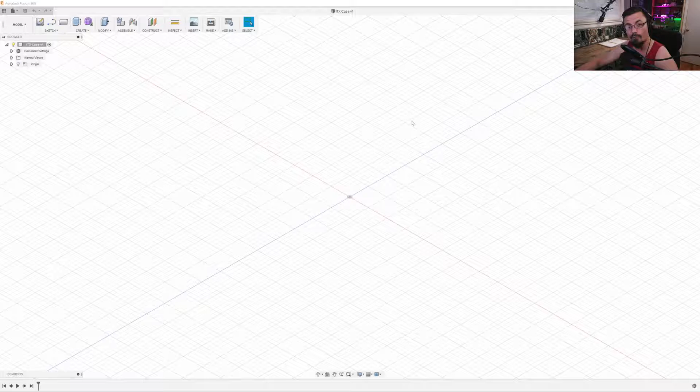I'm not sure exactly what the terminology of it is, but this is basically just your plane that you're going to be designing on. You can do general sketch things, you can create shapes, you can modify and add fillets or chamfers or anything like that. You can joint different components together.

If you do something, you can measure it. I mean, there really is a lot that you can do here.

You're kind of limited by some of the feature set, but with this program, you can also do stuff like patchwork, sheet metal. You can render your objects to kind of give your customer or designer a vision of what you're trying to build.

And I do have to admit, the renders do come out really freaking good. Also, there's animation, simulation. You can do your CAM, which is basically what tells the CNC machine and stuff like that how to operate.

Also, there's drawings, so if you want to do technical PDF drawings, you can. But like I said, what we're going to start on is actually over here, so why don't I transfer to the drawing pad.

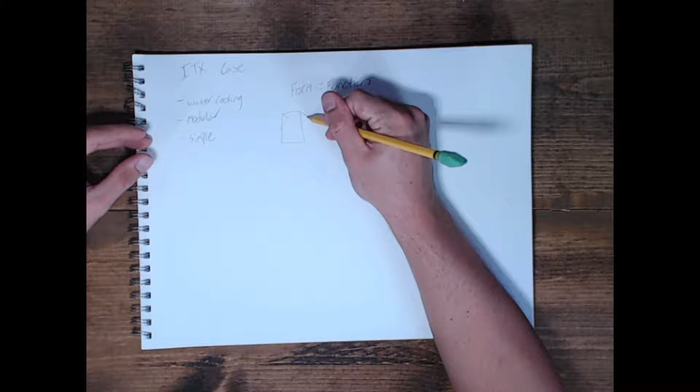So with that being said, most cases you just kind of have your basic square, no frills design.

A lot of people tend to mess up when they start these things because they design from the outside in. However, I want to design from the inside out, because I feel like in order to maintain the smallest footprint possible but pack it full of the features it needs, it has to be designed from the inside out.

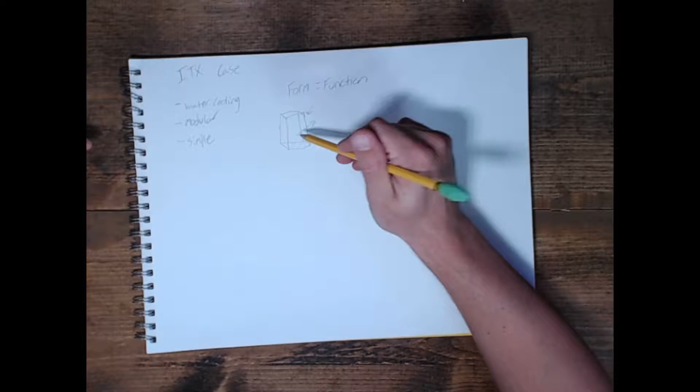So basically what's going to be on the inside is—this is the motherboard tray here. So we have a basic square, alright, nothing really fancy there. Don't know if you can see that very well, so let me try to dim this light down. There we go, maybe you can see that. So anyway, this is your motherboard tray, the mobo tray.

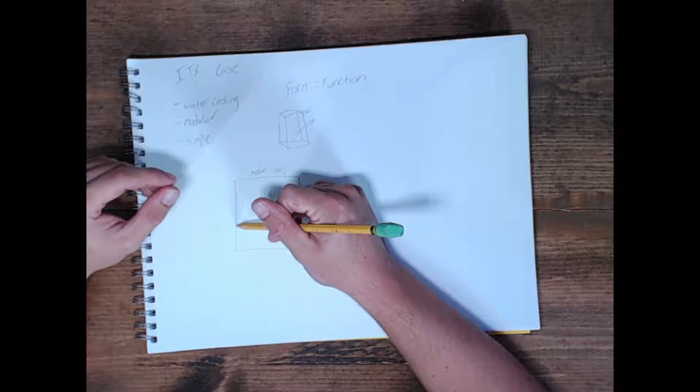So this is kind of top looking down. Most motherboard trays in an ATX form factor—you have your motherboard here, and then probably down here you have your power supply, and then over here you're going to have room for possibly rad and fan. So these are bigger cases.

However, what we're working with is on a smaller scale. So what we need is probably something like this, and the ITX motherboard is actually going to take up a majority of the tray. After all, this is a small form factor, and that's kind of the goal of it. You want to pack a punch, and you want to pack it small.

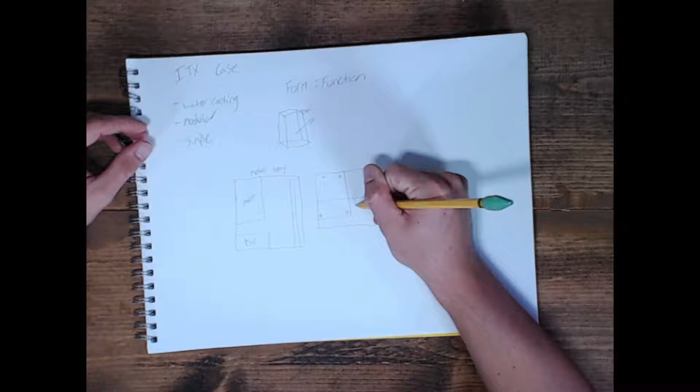So our video card would go something like here, because video cards are freaking ginormous now. We have a CPU somewhere in the middle here, and you can quickly see how we would run out of space. That's not even including the power supply.

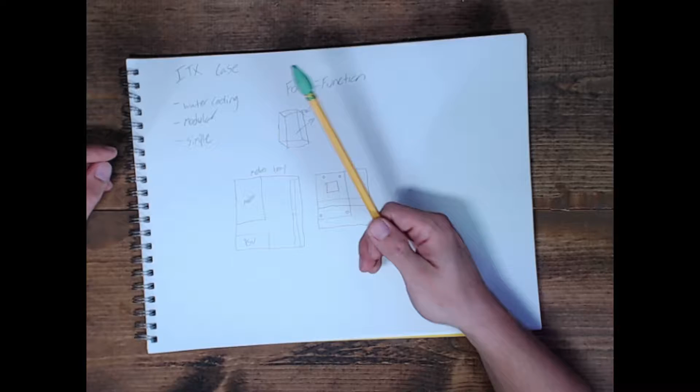So I think in order to do this in the most effective way possible, I want to be able to use full-size parts. I don't want to be limited to only using SFX or small form factor power supplies. I want to be able to put full-size equipment in here if need be. I would rather sell an option to run an SFX power supply and make room for stuff like maybe a mechanical drive. If I subtract function, I want to be able to add functionality, if that makes sense.

So with that being said, if we look at the back side of our case—just label that back—essentially I want a split design. I want to be able to house the PSU here, and then have the motherboard tray with the IO shield. Again, this is not to scale, this is just a rough copy, this is to help you iron out the details you're going to work in later.

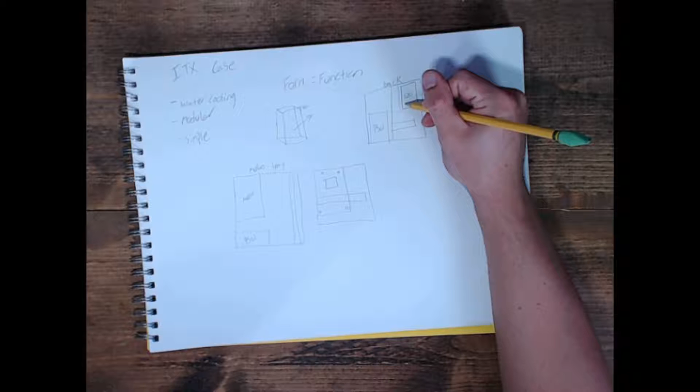So there's IO. I mean, we may be able to add a fan in here, but I feel like it's really going to add to the width of things. But again, small form factor—maybe we do want to be able to include like a 120mm fan. And then this is your I/O, and here is your expansion card.

So again, I hope this is starting to make sense when I design PC hardware. In some of the streams I've done in the past where I've chopped the video and brought it along, most of the time this sort of stuff is already done.

So we have the back, we have the top view of kind of how things are gonna look. I'm not really liking this top design, so I'm gonna go ahead and mark that out. We have our motherboard, our CPU, and then our GPU, which is gonna be gigantic.

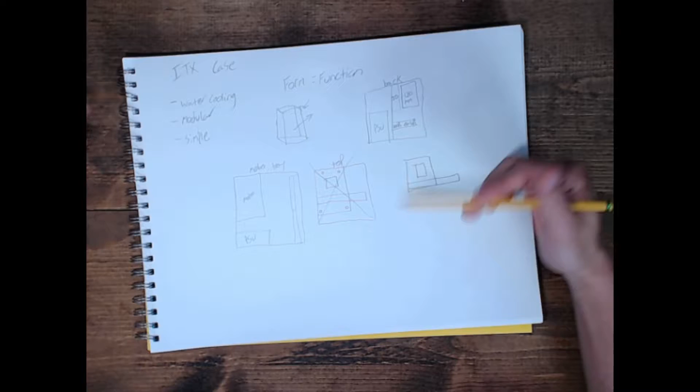So if we want to keep this water cooling friendly, I really want to be able to maybe put a radiator at the top of the case or in the front of the case. I don't know, that's going to take a little bit of thought process. So we know our power supply is going on the back, so that gives us all this room back here.

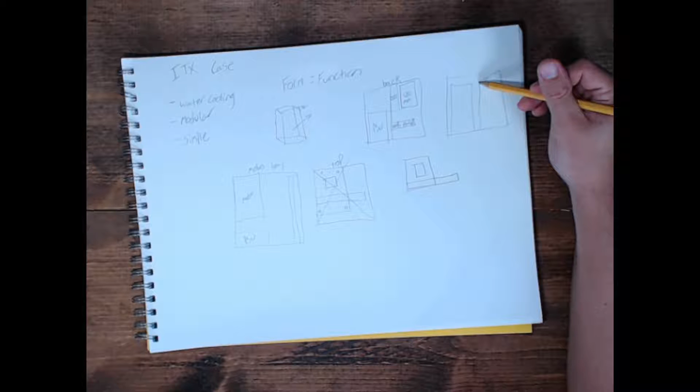So possibly we could even isolate the heat of the chassis coming from these components. Instead of putting a radiator in the front here, maybe we could put a 120mm hole here, or even on the front side of the case. Have it designed where maybe we can... let me see if I can do this without totally butchering everything. Maybe we can do something like this and have fans here and radiator here.

So what we'd actually be doing is mounting our pump and res on the back side, and then having a very simple tubing run. We can come out from the bottom underneath here, and then from there go into the CPU, and then maybe have a bulkhead here and here, and we're pumping all of the warm liquid into a separate compartment, since this will be split here.

And then with the 240mm radiator here in the front, we can kind of slimline this. So maybe instead of having that much space in the front, maybe we can just fit 2 fans here, if that's making any sense.

So essentially what we'd be looking at is a cube style chassis. Let me see if I can draw this a little bit neater. So our 2 fans would actually come fairly close to the edge there, and our radiator would come fairly close to the edge here, and then we'd run as thin as possible down the center.

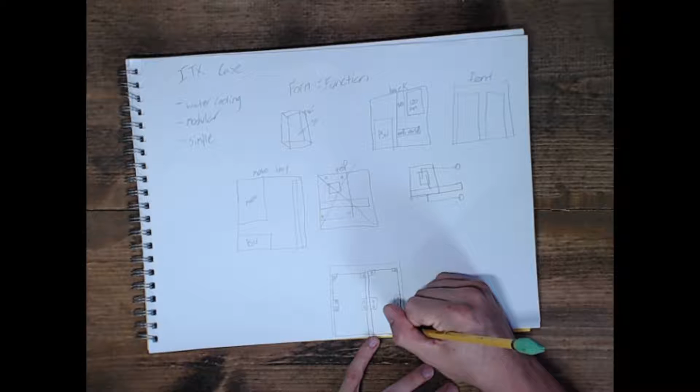This mounting hole, mounting hole. And I am by no means an artist, but anyway, so maybe we can do something kind of like this.

It would be a wider chassis, but we'd probably also be able to make it shorter as well. So even though it's kind of wide, honestly it'll be less than like an Air 540 from Corsair, but it would probably be smaller than... trying to think of words here, but they're escaping me.

Anyway, and then when we look at the top side of things, so we have our motherboard tray. It's gonna come in here, slide all the way forward. I really want it to be able to butt up against the front of the case. One, that's gonna make this a lot more rigid. So basically, if it fits in the slot over here in the front, that would be fantastic.

The only thing is we'd have to make sure that the slot's rubberized or something, otherwise the fan vibration will cause it to crack. So we'd have I/O coming down, our motherboard taking up a big chunk, and then we'd have our CPU block sitting on the CPU, and then GPU would be looking something like that.

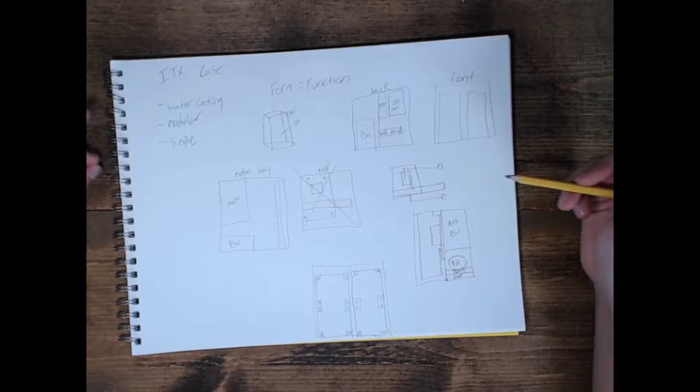M.2 storage has come down a lot in price, and a lot of times you'll find that even on ITX motherboards, you can still get NVMe storage installed. So I'd rather have one big NVMe drive, possibly mounted on the back of the motherboard tray. We could include one or two 2.5-inch SSD drives here on the back, and that could give you more storage if you needed it.

So on the front, now I'm wondering - a lot of times with case design, your airflow comes in the front and then either gets exhausted out the top or through a rear fan. That's what we've got to consider, because ITX boards, where everything's so compact, you can run into heat issues with your power delivery. So we definitely want to make sure our stuff isn't going to overheat. So how can we do that?

Because honestly, what I would love to be able to do is have glass here on the front with maybe like a standoff or something behind it, so it actually sits off of the case a little bit and allows air to come in through the sides, but you still get the nice look from the glass.

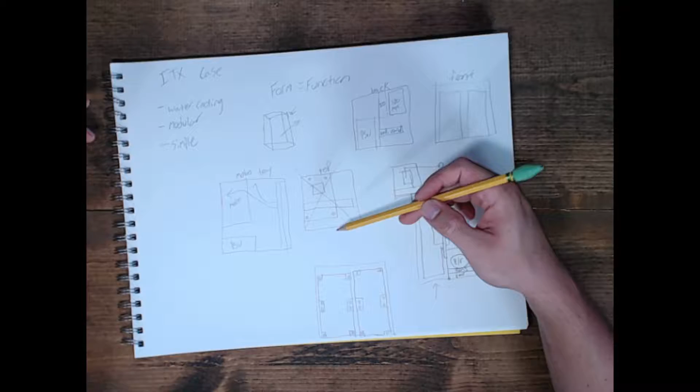We could also kind of go vertical instead of horizontal, or not even horizontal, but width. We could include a mount kind of like what's on the BitFenix Prodigy. So maybe it would look something like, here's the back of the case, and then we have the PSU, and slightly above that we have our motherboard. That would give us room for an exhaust fan here.

And then we could extend this out a little bit and have room for a thin rad, fans, and possibly even a pump res combo.

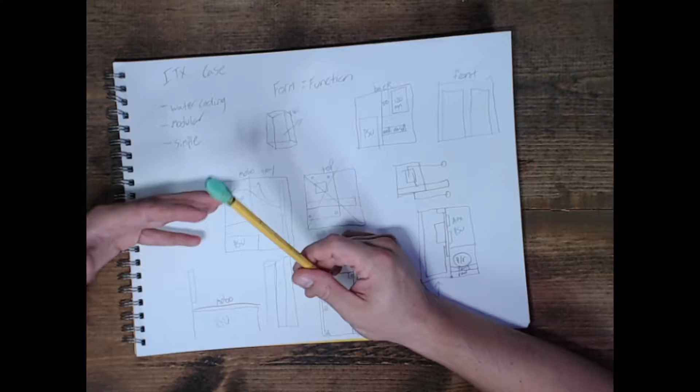Again, that's a terrible representation, but we could potentially make this about as wide as an actual power supply, because most name brand power supplies now are modular. So we could get custom cables made, or we could figure out ways to store those and not be bound to having a gigantically wide case.

But again, I like the idea of just setting these up as separate compartments, and that way most of our heat blows out this way. The power supply would help assist in blowing out the hot air out the back. We would probably also have a fan mounted here, so the power supply wouldn't solely be responsible for sucking out the hot air and blowing it out the back. We would also have another exhaust.

So I'm leaning more towards this. I would rather have a fatter case that we could possibly have like a gigantic tempered glass window or something on and make it look really, really neat.

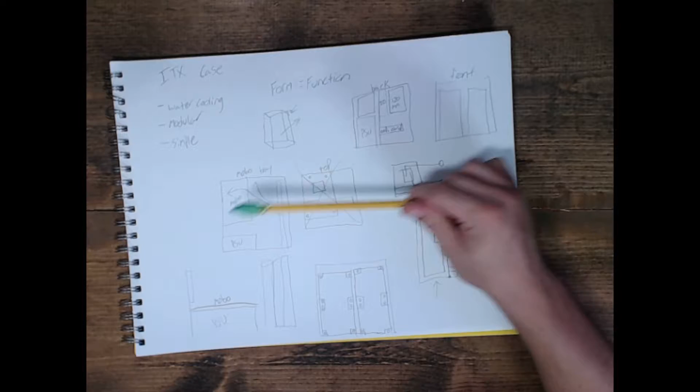So yeah, with that being said, I think now we can actually go over here to Fusion, now that we have a general idea of what we want. So let me switch on back here.

Now we can actually start modeling something. Again, I think it's just overall easier to jot that stuff down on paper, get an idea of what you're working with, and then move from there.

So what I'm going to be doing now is, on a separate tab, I have Firefox with the different dimensions that I need. I have my motherboard dimension, a fan dimension, a radiator dimension. It's good to keep a tab open with these separate things, so you can reference them on the fly.

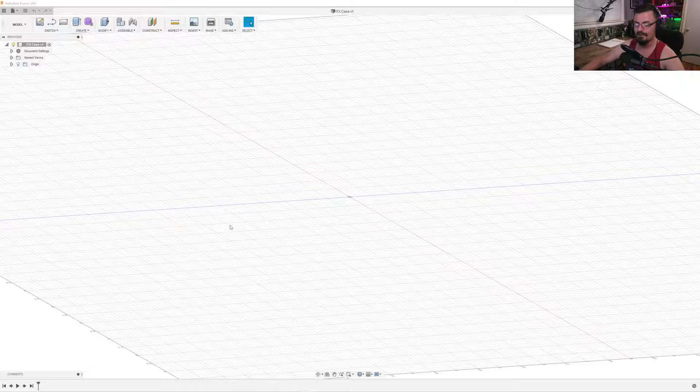So the first one we probably need to look at is this one right here. Let me minimize that and bring it down. I love when drawings have not only the English measurements but metric as well. That's super handy, way more handy than it probably sounds, but it's useful.

So I'm going to face the front view here. It appears, looking at this, that the average ITX motherboard is about... did they not include that measurement? So 6.25, and then you add another 0.25, so that's a quarter, so that's 6.5, and then you've got to add the 0.3 here. So 6.8 inches wide. Oops, don't want to cancel that.

So what I'm going to do is draw a center rectangle right here in the center. I'm just going to type in 6.8 and 6.8. And that is a motherboard. Good job, everybody, stream over—just kidding.

So now we have something to reference what the motherboard's going to take up as far as case size. Most of the time this PCI slot is right against the bottom here. Even if you look at the reference drawing—whoops, don't need the downloader for Firefox—there we go. So even if you look down here, your PCI slot literally sits on the bottom. So we have to take that into account.

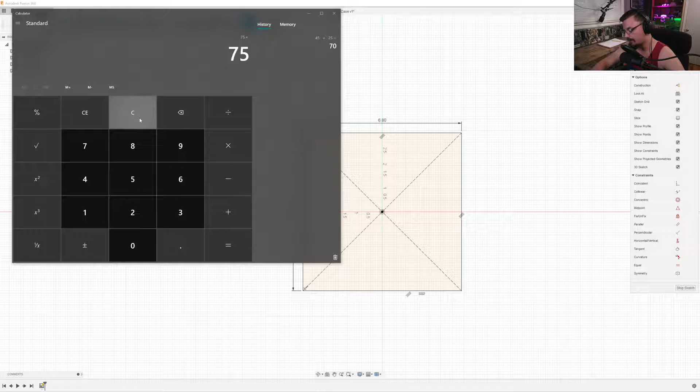So if we take 45 and add another 25, that's going to give us 70 millimeters. You probably want just the teensiest little bit more, so I'm going to say like 75. Alright, so what we have to do is take 75, and we're actually going to times that by 0.0394, and that's going to give us just under 3 inches.

So I'm wondering, for the sake of design, if I should just add 3 inches to the height of it. Probably add 3 inches to the bottom as well. So we're going to be extending this probably 6 inches.

Nope, I don't want that one. So if we go 6.8 plus 6, we get 12.8. So that's going to be our height.

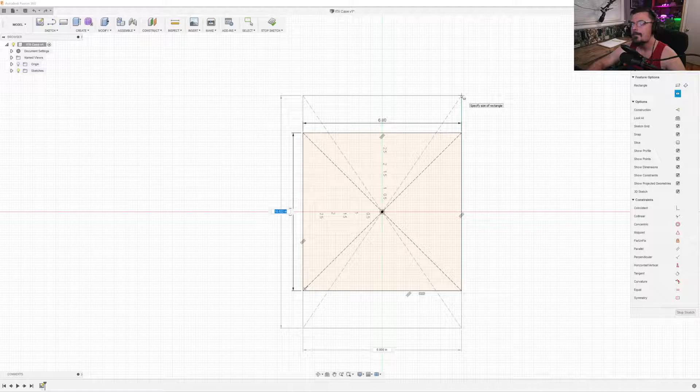Wait a minute, I'm so stupid. We're not adding 6 inches to both sides. Let's try that again. Curtis can't math on a Friday night. Don't try math, kids, not even once. So that would actually be 12.8. No, that's what I just did. 9.8. If I go 3 and 3, that's 6 plus 6.8, so 12.8. That doesn't look right, that's adding 6.

Hang on, I'm having a massive brain fart right now. 6.8 plus 3 would be 9.8, and then, yeah, I'm right. Golly, don't ever second guess yourself, kids. Oh man, alright.

Now we have our 12.8 height. We just need to figure out our width. So a lot of the video cards can be like 13 inches or something crazy. So we definitely need to see what 13 inches looks like. So that's pretty wide, and you've got to take into consideration that doesn't include fans, if you want fans on that side of the case.

I feel like we need to do a little more scientific research. So let's open up this bad boy. We're actually going to go to newegg.com, then we're gonna go look at some video cards. Wow, Firefox is kinda broken, it does not want to work.

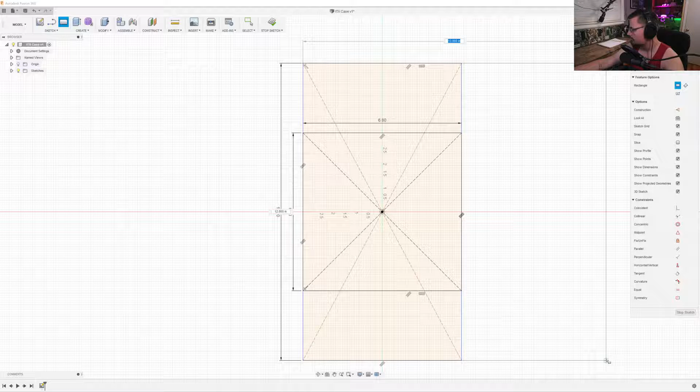Yeah, I think that's what I'm gonna do. I'm thinking making it long, so if we go 13 plus 3, that would give us 16. I'm looking at my computer over here, just kind of debating on the best course of action, because I have the EK bracket, which brings the pump res combo about that far away. So we would have 16.

I'm just gonna make it 18. That's what we're gonna do. Can I delete this line? Or is that... haha, I can.

Yeah, so we would have a gigantor video card over here, and then the possibility of pump res combos right there. Also, we could mount pump res combo over here. And if that's 18 inches, we could possibly even just put one 360 up top. Ooh, that's interesting. That's very interesting.

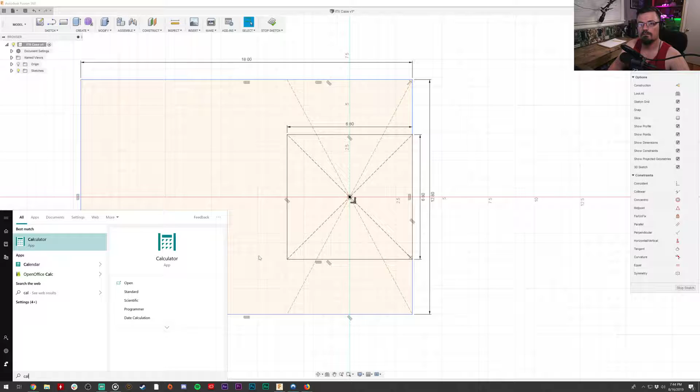Okay, so let me... Oh, I won't take fractions, dag nabbit. Where is my calculator? So we go 1 divided by 16, and that is 0.0625.

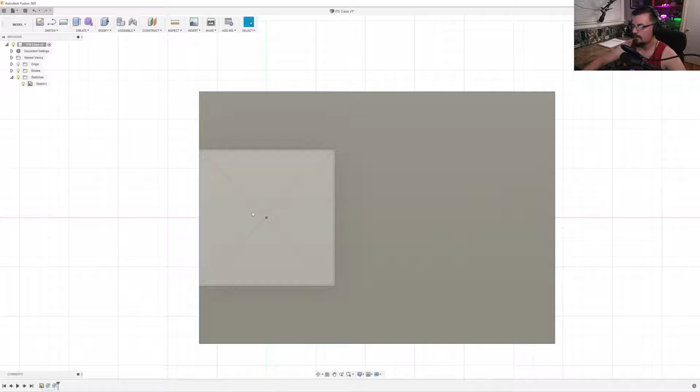Symmetric, so it's on that axis. Alright, so that's the beginning of a motherboard tray. We made a rectangle. Also go back and reference this. Again, that's just to kind of give me a reference point for the motherboard, I know it's probably not going to be that thick.

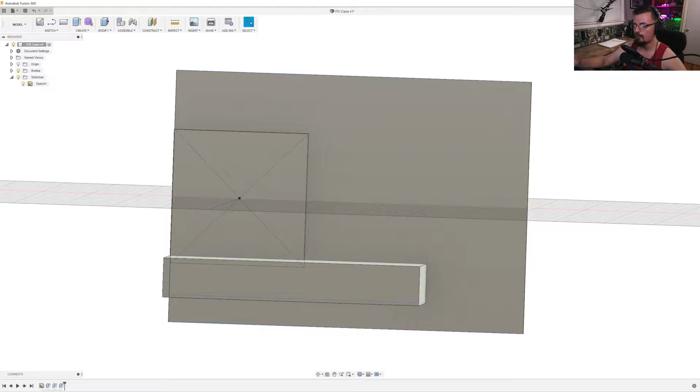Oop, I don't want that. What I could probably do is grab right here. Let me go 2, and then we said 13. Come on, boom. Alright, so now we're kind of getting some reference points looking at what we're doing here. It's looking very nice.

La-di-da-di-da. Hey, again, this is how I start a lot of my designs, just mocking stuff up and... ooh, don't want to show that. Whoops. Alright.

So what is the thickness? We have a 5 - no way, oh that's like the actual height. It's like 5, okay, that's not bad. So we actually figured on the high side a little bit at 6.5, which is fine, that'll give us additional clearance. But now we can kind of get an idea of what the width of the chassis is going to be.

So let's go to the back side, and I'm going to look up ATX PSU dimensions.

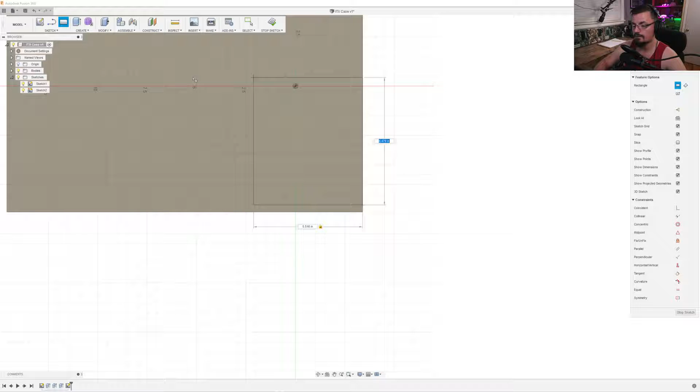And how much did Firefox say? So we have that. So it's going to be 140 by 86 by 150. So one of those measurements is wrong. This one is actually 5.91. This one's actually 5.516. And then it comes out 3.388.

Okay, so we got our motherboard, we got the video card, we got the power supply. Essentially, our width is going to be just past this and just past this. So how far are we currently? Roughly 10 inches wide, which isn't bad. That's not bad at all.

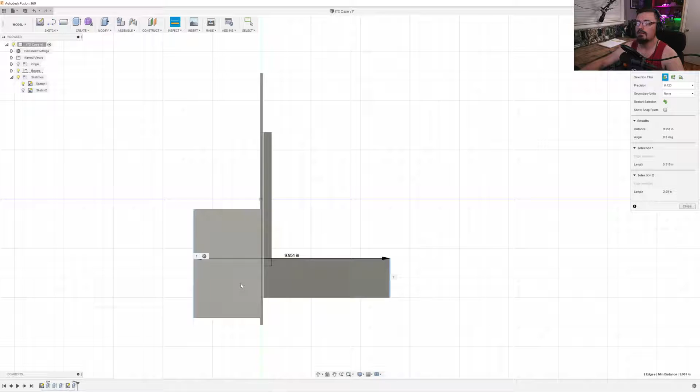However, that's not actually going to be the width, because we also have to factor in being able to put in a 120 millimeter fan here, as well as pump and all of that, which will fit inside the confines of that fan.

So I'm going to do... Let's actually pull up Firefox here. Where is... there it is. So 278.5 plus 14 plus 36. Oh, not 369. Dang it. Alright, 278.5 plus 14 plus 36 equals.

Okay, so length is going to be 328.5. What? No. 75 millimeters by 328.5 millimeters.

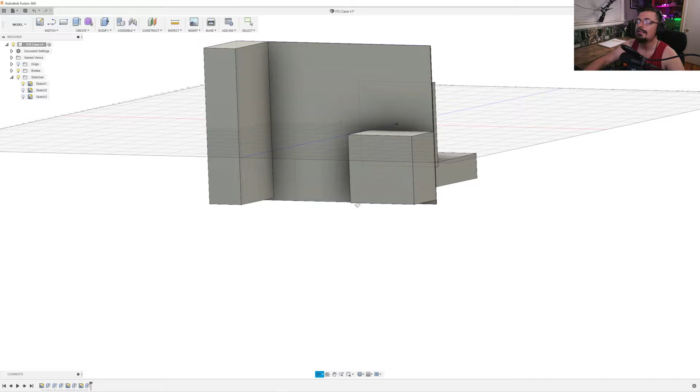So radiator is probably gonna sit, let me see, how wide is our radiator? Width is 130, 130 millimeters. Okay, so with radiators and fans, this is kind of the thickness we can expect. We still have plenty of room to be able to mount our pump res combo here, and quite honestly, definitely room for some SSDs.

Now it's looking like, however, if you kind of glance at it like this, we don't have a lot of room to mount a pump res on the other side. That's fine. I mean, we could even go ham and flip the case on its face and actually install a res up here. You can install a mini one in the front. I mean, we have some possibilities.

Or let me check this real quick. Got 360 millimeter radiator dimensions.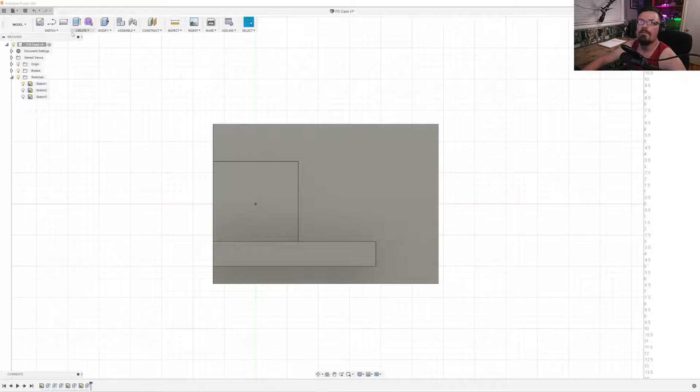We'll go two point on this as well. And I kind of want to see what it would be coming down from that way. So if we go 412.5 millimeters by 75 millimeter - oh, that's not right - 412.5 millimeters tab by 75 millimeters.

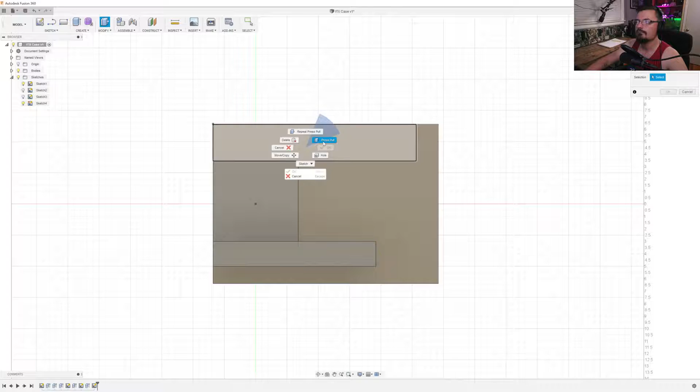And let's pull that back up, see how wide we need to be. Again, 130. Whoops. Got me, dang it. There we go. No, what are you doing? Stop it. Stop it, get help. There we go. So 130 millimeters.

Alright, that is not a lot of room or clearance. I mean, considering that's rad and fans, that's really not terrible. The only thing is we're actually going to have IO sticking up right there. So I think this would have to kind of move out.

So let me go here, this is a new body. So now we can kind of grab this and say, well, we want to kind of move it well out of the way of IO. So let's go with - most radiators try to kind of put it towards the edge of the case and offset it. Let me figure out how far we are over here first, because I don't want to explore this option if it's going to limit us too much.

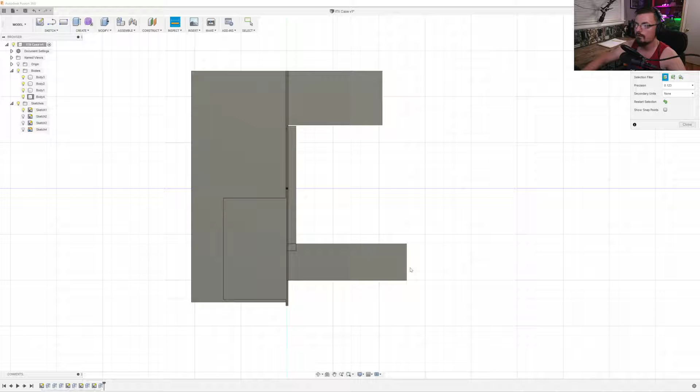So let me... we're going to measure from this point. Whoops, that's not right. We're going to measure this line. Stop it, stop it. There we go. So we're sitting roughly 6.5.

So, this is still gonna be pretty freaking wide. Let me do some maths. 6.5 times 25.4, convert that to millimeters. And then we subtract 130. We'll divide that by 2.

So let me try and see what this looks like. We'll take this radiator, we're gonna move it 17.55 millimeters. And then we've still got plenty of room over here. So what I'm thinking is we'll split the difference here and put the radiator kind of in the middle.

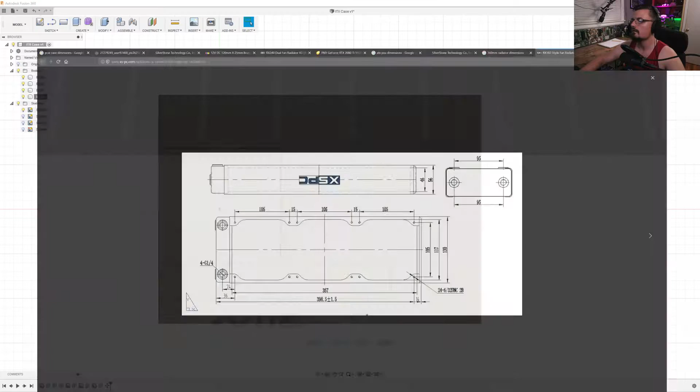Alright, so we have 18 times 25.4, convert that to millimeters. Then we go minus 412.5. That's going to give us 44. Alright, so let's take this and we're going to move it 22.35 millimeters.

My dogs are barking outside.

Because that's a 240 right there. I mean, we have the teeniest little bit of room on the bottom, but I just don't like that. But I've got to have that height, so that's going to be a lot of dead empty space up at the top.

Oh, decisions. Alright. So what I can do...

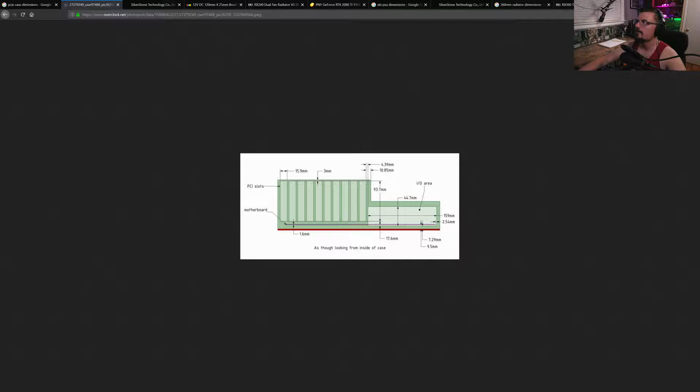How much does the IO plate come up? So, my guess, so just shy of 2 inches. It's at 44 millimeters. So if it comes up just shy of 2 inches there,

I may have to offset this rad a little bit more. Actually, I definitely will, because it's not going to be sitting perfectly at 6.5 up against the edge there. So if I go out like 7 inches on this side, because the graphics card's going to be roughly 5.5, plus if you have a water cooling block, the terminal for the actual input and output of the coolant is going to stick out maybe another inch or so.

So if I go like 7, that should give me enough room there. Let me delete that movement. So what I should probably do is some more math. Go 130 for the width. Actually, nope. 7 times 25.4, convert it to millimeters. It's 177.8. We'll go minus 130. That's going to give us 47.8.

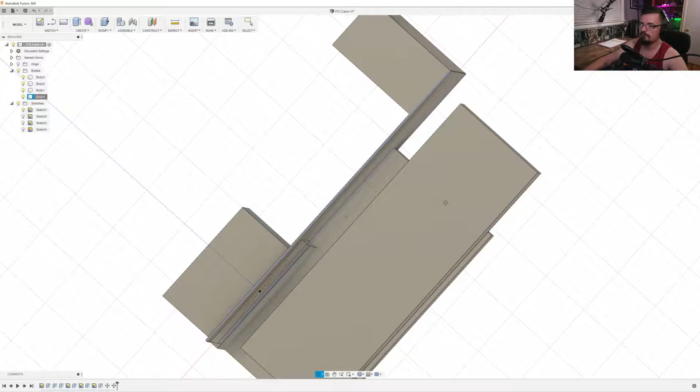And then I should probably move it 3/4 of the way over, instead of splitting it in half, move it like 3/4 of the way, if that makes any sense whatsoever. So let me divide that by 4, and then we're going to times that by 3. Yeah, I think that's going to work perfect. So that'll be 35.85 millimeters. Oh yeah, that'll give us plenty clearance for the IO. Definitely. Alright.

So now that's sitting pretty in the middle. What was... Make that a new body. I need to know the difference between here and here. There.

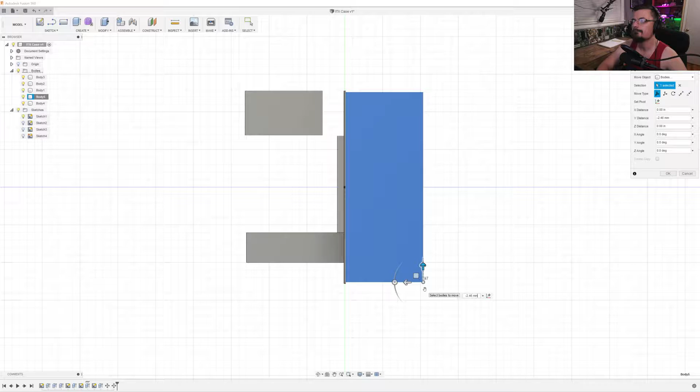And there. So we got 0.194 times 25.4. Divide that by 2. We need to move this down almost 2.5 millimeters. Whoa, okay yeah. So we're gonna choose that, and we're gonna go minus 2.46 millimeters. Boom. So now that's in the middle. All right.

So it's coming along, we're making a little bit of headway. I really want this to mount against the back, and I think the fan should probably go on this side. And again, the extra width, as air moves through the front, it would be able to be sucked in through that power supply fan and moved out the back, as well as adding another 140 millimeter or 120 millimeter fan here.

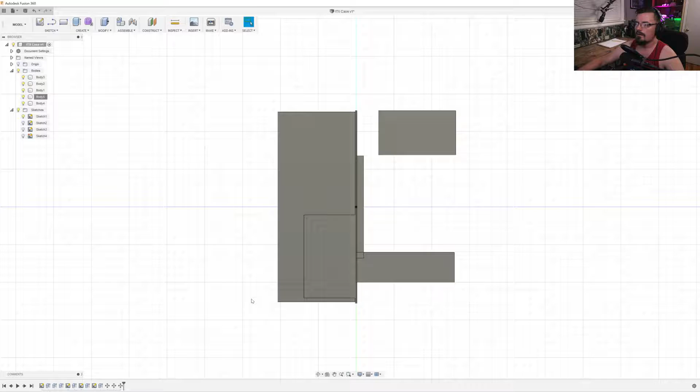So that would be still not as much width as that rad is. So if we're 7 inches out this way, probably another 3 or so over here. Actually, probably more than 3. Way more than 3.

Okay. See, I feel like that could still work though. Because we could just do... I mean, this is way freaking overkill for an ITX rig. I mean, you have a 240 here, you have a 360 there for a CPU and a GPU. Like, the 240 alone could handle that.

But I'm trying to think, in worst case scenario, somebody fully kits one of these out. I think this is still plenty room to be able to mount like a reservoir right beside the motherboard tray. I mean, just boom, right there. And then if you didn't want to mount it there, you could most certainly mount it on the backside on this rad. I mean, there's so much room for activities over here. And cables and SSDs.

And then you could have the power, 24 pin here, 8 pin, will kind of come from there, circle around, and plug into there.

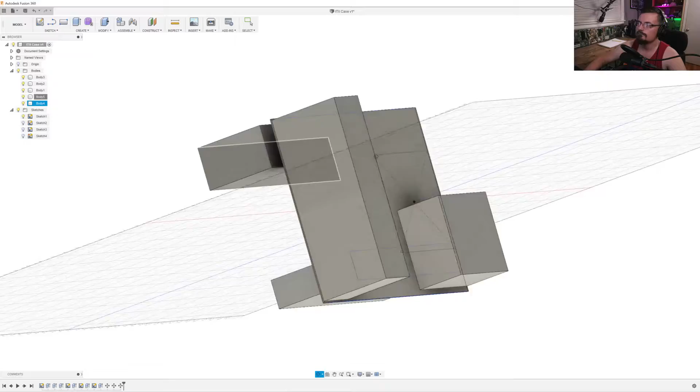Okay, I'm digging it, I'm digging it. And even if you have an air-cooled card, you still have plenty of room down here for ventilation. Cool.

The only thing I could see being tricky is running your cooling in between the two compartments, being able to tie in this rad to this rad.

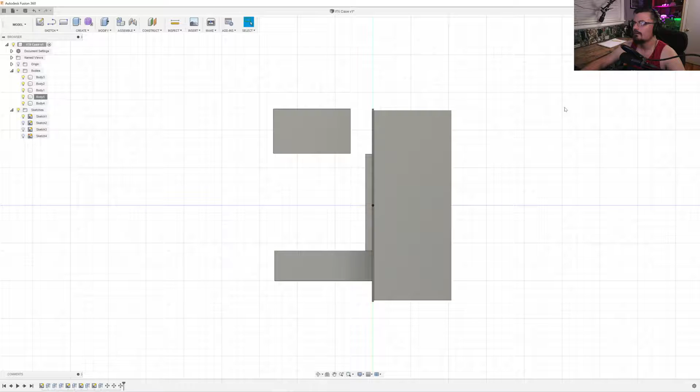Really, if you wanted to, you could almost run this in parallel, where you would have one fitting come... let me do it this way so I can kind of explain that better. So you would have two fittings, say down here. You could have this one run up, tie into the inlet of the pump reservoir. You would have the out, the pump come down, run it across here, go through there with the bulkhead, underneath here, come out, go into the video card.

You could like T-fitting, come out with both, go into the CPU with both, come out of the CPU, go into the rad with both, and then have your out come down over through another bulkhead and then into this radiator.

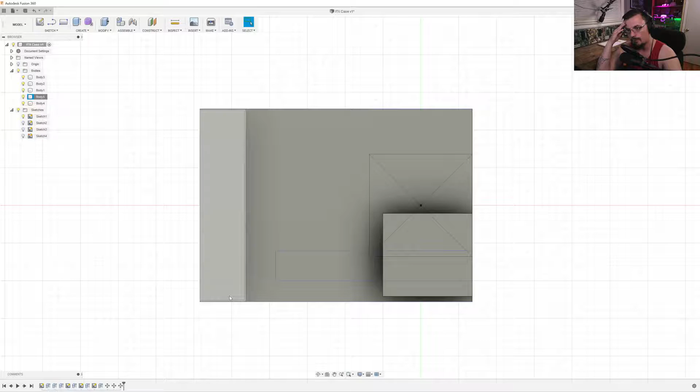The only thing is, I would probably go DDC with my pump at that point, just because you would want the extra head pressure of a DDC, because that's a lot of radiator, which doesn't restrict flow too bad.

But if you're running parallel, I don't know, I would have to kind of seek advice on that one, because parallel is more efficient for your pump. The only thing is you'd probably have to have the speed a little bit higher to get the necessary flow, and then you'd run into audible noise.

I don't think that's going to be quite enough room for... I need 25 millimeters at least in between that point and this point.

Alright, what was the second move? Was this? Nope, reverse that. Second move was that. Okay, good.

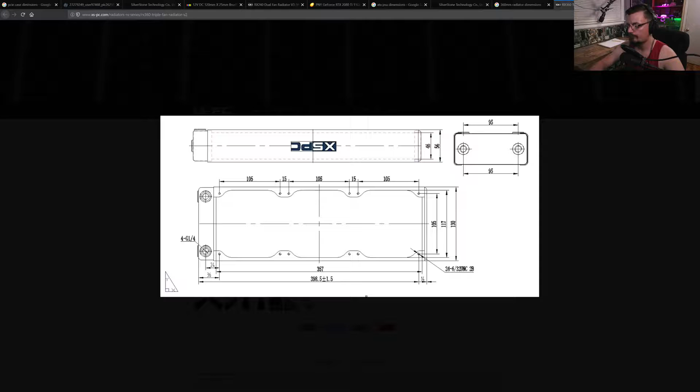So I need to reference that. So we go 398.5 plus 14, and then 18 times 25.4 to make it millimeters. We go minus 412.5. That gives us a difference of 44.7. Divide that by 4. So we need to move this way 11.175 millimeters.

So that gets us back off here a little bit. Our fitting could come down here or over here, and that'd be a little bit closer to the CPU. So that might work. So we have motherboard, video card, top rad, side rad, power supply, and then the motherboard tray.

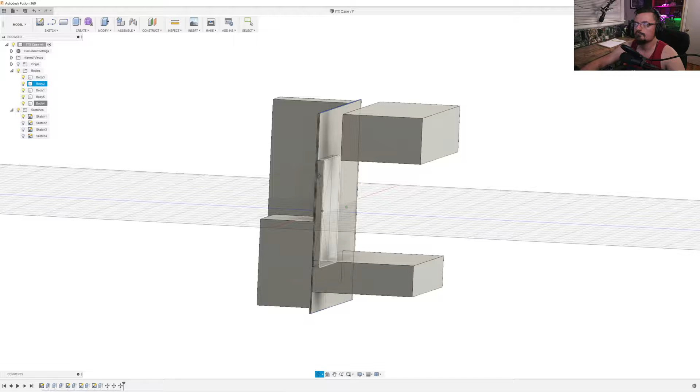That's starting to come along. Now the burning question: can I get 25 millimeters up this way?

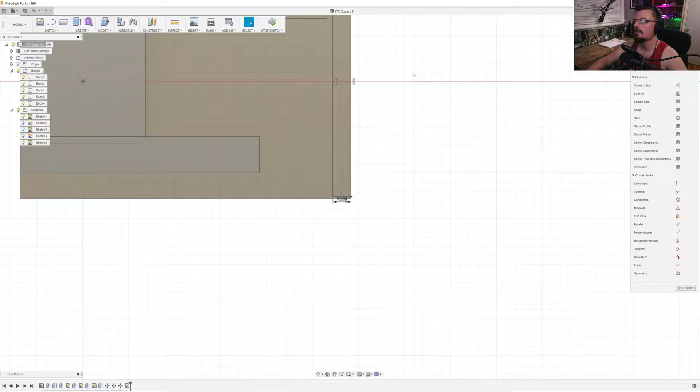So this would be... what's the dimension of the fan again? It's not 100. Oh, it actually is 120. Okay, good to know. So we have 120 millimeters.

Yeah, so we would actually now have fan clearance. It would be kind of counterintuitive because you have radiator and fan, and then you have two fans.

But luckily with that mount, you could even mount your pump res over here if you didn't want it back there, to be able to show off your coolant and stuff a little bit more. But it's nice knowing that if for whatever reason somebody wanted to install fans here with fans and a rad right there, they could. It wouldn't be that big of a deal.

Personally, if it were me, I'd probably run a push configuration with air coming down here and then kind of coming out the back through an exhaust fan there. But let's see.

So if that comes out 7 inches, so 7 times 25.4. Is that right? 7 times 25.4. Huh, I guess it is. And then we go minus 120, divide that by 2. Okay.

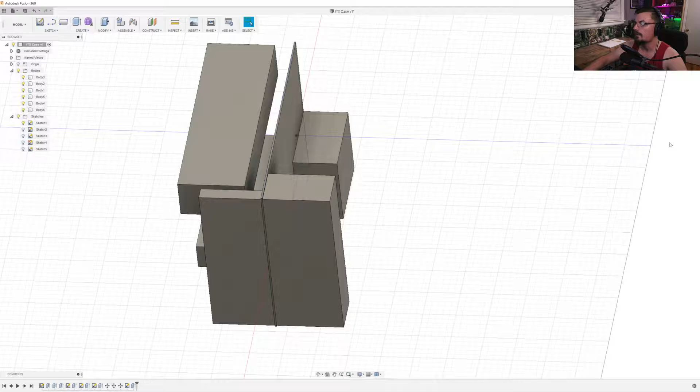Need to make that a new body. That needs to move 28.9 millimeters.

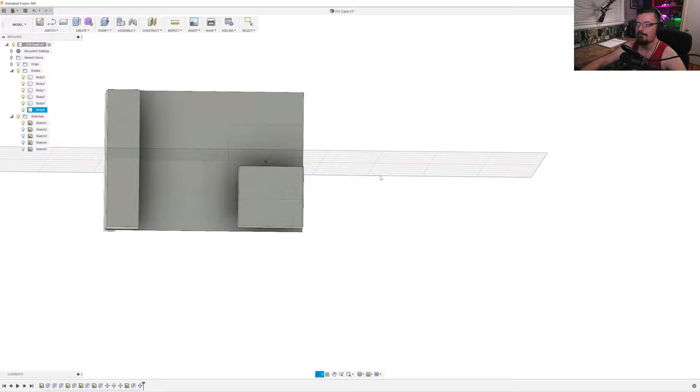I have a feeling this is going to end up being roughly the size of an Air 240 from Corsair, because it's got this compartment on the back. Truth be told, if we really wanted to, we could add room for a 240 back here.

I think it'd be pretty sick to kind of leave the front open so you can see, because most computers are going to sit kind of like this on your table. So you would be able to partially see through here, see the big glass window there.

Okay, okay. I'm gonna go ahead and save though, just in case something crazy like the power goes out.

You can see that offset I'm talking about, most manufacturers do, where it doesn't sit perfectly in the middle. This is in the middle of that compartment, so there's going to be this much space over here.

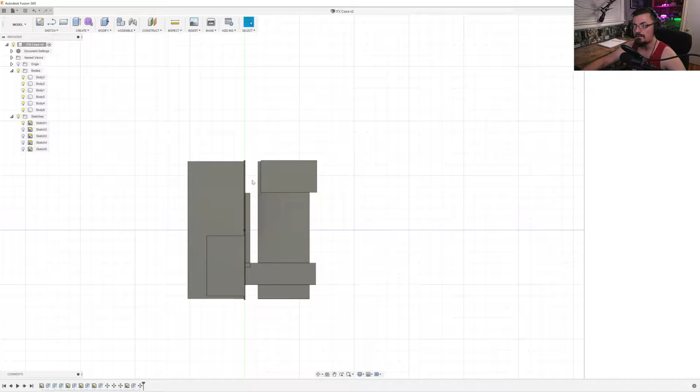Okay. Man, this is actually going to be a really cool little system. Alright.

So we have cable mess room here, we have pump res room there if we desire. I mean, we could probably even squeeze pump res in here if you want to try to keep as much room over here as possible. So say like

You do want to run actual— that's super distracting. Okay, anyway, sorry. So say if you wanted to run mechanical drives on this side, you would be able to have room, and

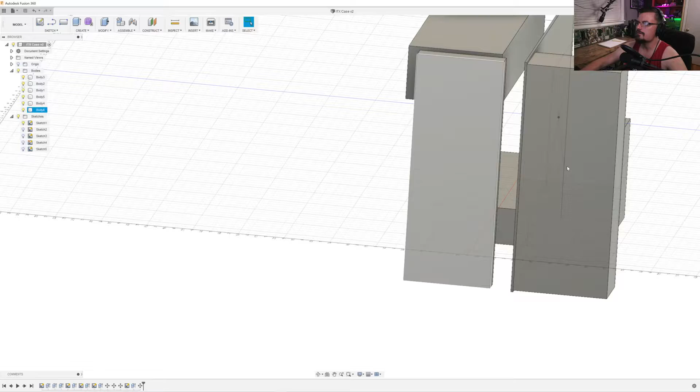Maybe we could have some pre-drilled screw holes or something, so that way you would just be able to get the mounting bracket and mount like, you could probably put 2 drives, 1, 2, 3, you could probably put like 4 to 6 mechanical drives in that space.

I mean, it would be kind of cool too to be able to see like the mounting cage and maybe like a drive rack through that glass panel as well. So I don't know, maybe. Again, I'm planning on having glass in the front, but who knows.

Alright, let's take a look here. Honestly, this would probably sit up just a little bit more, this video card.

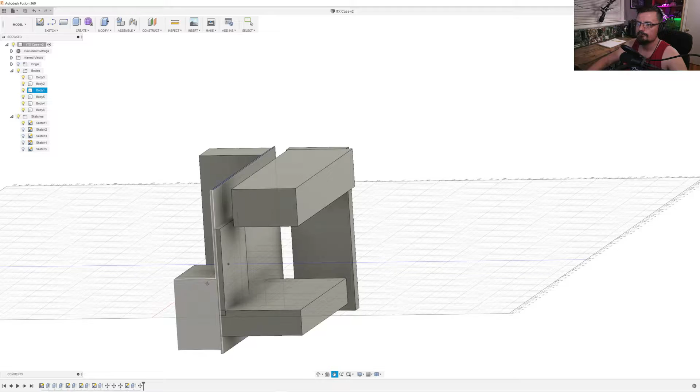We have a power supply. That would be sitting up against that.

This side panel I would probably ventilate on the side, so that way it would be able to pull cool air from the outside as well as the warm air and exhaust it out the back. Or I don't know, I may just leave it solid, depending.

What would be pretty awesome though is if you so choose, you could take and put fans on the front of here and then also be able to mount hard drives here, so that way you would be able to cool your storage arrays. That's a possibility.

Again, this is not going to be a very small ITX case. One thing I'm toying with is the idea of also having a handle on the top of it, so you would be able to carry it to LAN parties.

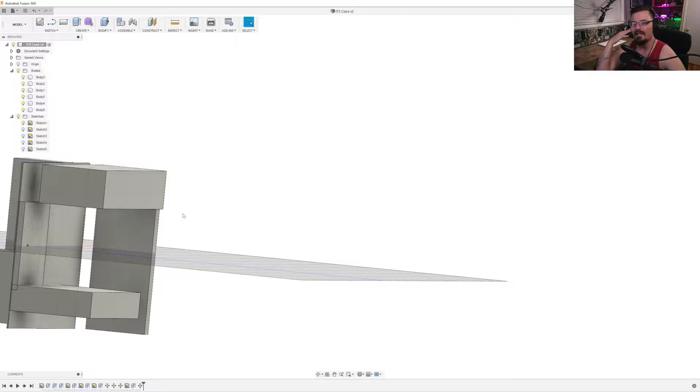The only thing that's kind of scaring me away from that idea is just where, I mean, if you water cool it, this thing's going to be so heavy. Like, it's pretty unreal how hefty computers become once you water cool. Alright.

Go ahead and hide my sketches. I guess one thing we could do is go ahead and mount or get holes put in that back plate. Well, I don't know, I think I'd rather wait until we actually get this portion done.

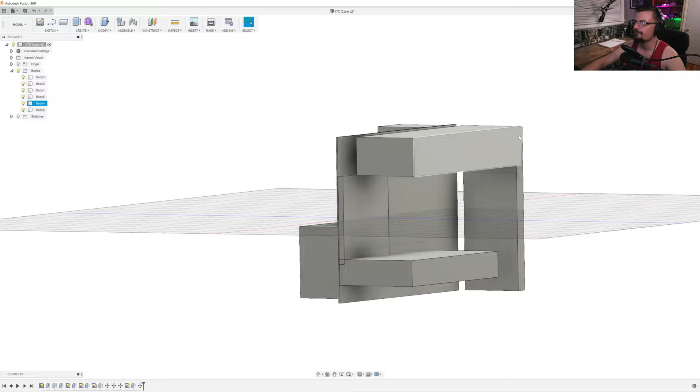Because what I would like to be able to do is have a tab here, or something, so that way the back plate would screw onto the motherboard tray and then make like an L-shaped panel. So we have 12.8 by 18.

Well then. I'm wondering if we need to go back to the pad over here, kind of think up how we could do this. Because I don't know if that would be rigid enough, just including little tabs.

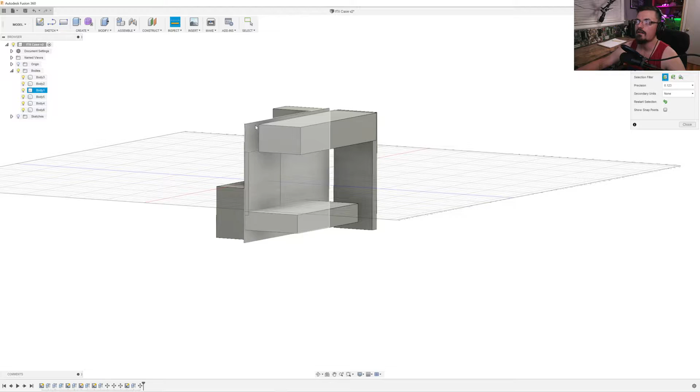Yeah, this whole modularity and being able to flat pack these things, that's definitely gonna be interesting. So essentially this thing's gonna fit in a wide open slot here in the back. I don't know if any of you are familiar with Case Labs, but that's kind of where I got the inspiration, because their cases shipped to you in a flat box and you assembled everything.

What's up, RJ? How you doing, buddy? Alright.

Doing a little design work. I don't know if this makes any sense to you, but I'm making a computer case. In order to make the case, I gotta know how big the components are, so I can play around with measurements - this is the motherboard, this is a fan and radiator, that's a video card. Right now I'm just at that point where you stare at your project and try to visualize every detail, and try to think of it from a different point of view. Like, I would build it a certain way, but other people may not.

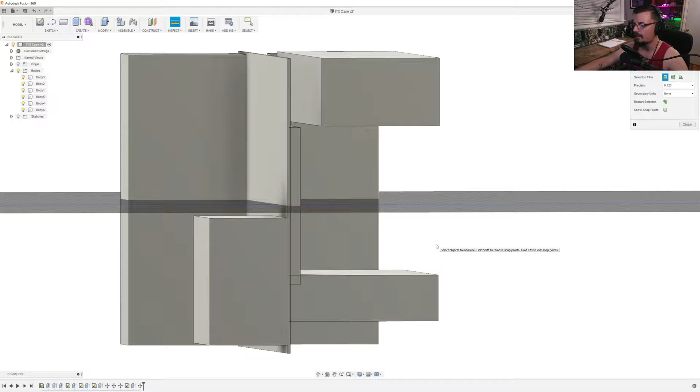Doing good, bro, and yourself? And hell no, I don't. It's all good, man, it's all good.

Yeah, this is just something I do on a daily basis with my 9 to 5, and it's kind of fun. I like making stuff. Just gives me an excuse to be a little creative.

Alright, so yeah, I think I'm at that point where I gotta go back to the literal drawing board. So let me exit out of some of these little windows here. Alright, so.

Alright, this was kind of the layout when we got everything started. We'll flip the page. Alright, clean slate. So first things first, we have our kind of general shape of our motherboard tray.

So we know the video card comes out somewhere roughly in there. Behind it is the motherboard. And then - y'all didn't know it was Arts and Crafts Day, did you? And then this is gonna extend like that.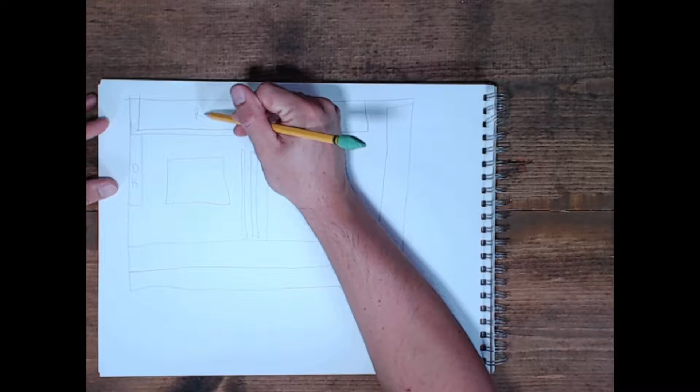Alright, so this is the front. So if you're looking at the computer head on, or side on, this is what you would see. So what I have to consider - this, we're gonna draw our little sticks of RAM, video card, fan. Alright, let's see.

So essentially, the way this is probably going to need to be built, if you're looking at it from the top, is there's going to be a piece of metal, and it's going to screw into the top portion of this little tray. So there's gonna have to be tabs. I think that's the only way this is actually gonna fit together.

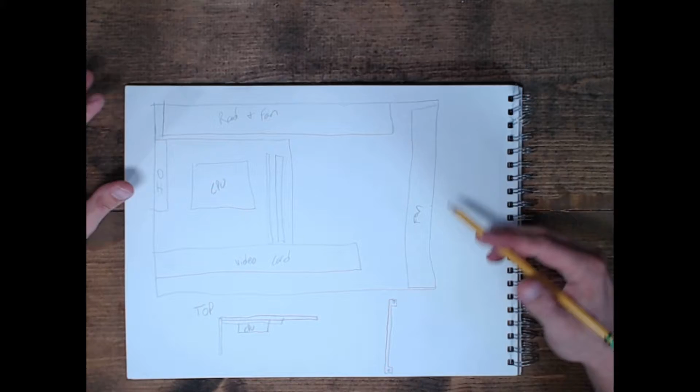So maybe if I do a mixture, do a tab kind of like that. So this piece right here is this piece on the motherboard tray. So essentially, motherboard goes here, CPU, and then the graphics card sits down there. Again, this probably looks like the biggest mess of jumbled sketches ever, but that's okay, that's kind of the point of it. You rough draft everything and then design it.

So if this is this piece, which I'll label 1, this is 1, tray is 2, I would probably have to design little tabs, say like right here, and then these tabs will go right here and right here. What that's gonna do is when you mate the two pieces together, instead of just having one mounting point where this piece only mounts to here, it's gonna allow it to flex like that. So if we do it on both, it'll actually make it a little bit more rigid, and it won't want to try to crease or fold.

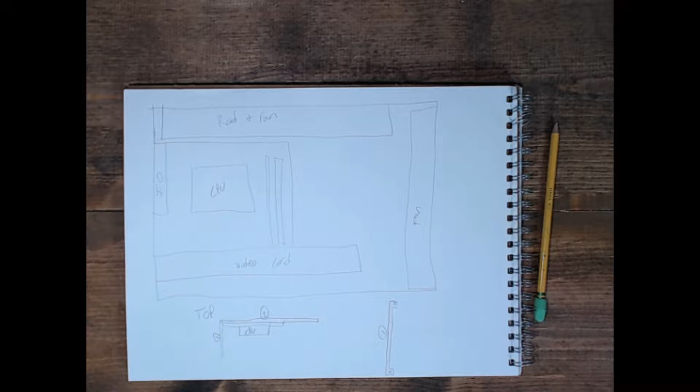So if I go back to the CAD software, alright. So I can actually go and hide some of these. What in the world? Oh, that's why I couldn't. Okay.

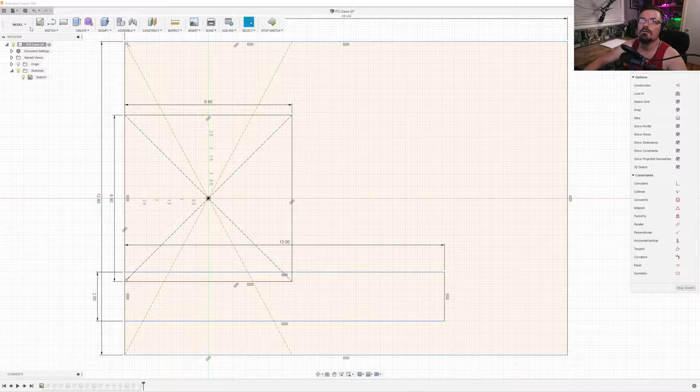Alright, so this is our original sketch. What I need to do is actually pull the mounting hole measurements off of here and apply it to the tray. I'm going to minimize that a little bit, keep it down here. And how we're going to accomplish this is a bunch of little lines. So the first one comes over 0.25, and goes down 0.40.

I really hate how they measured this because you have to do a whole bunch of extra math. Alright, so those holes actually line up. So what I'm just gonna do is - that was sitting flush there. So now I can take this line, we're gonna go over 6.20, then we're gonna go up.

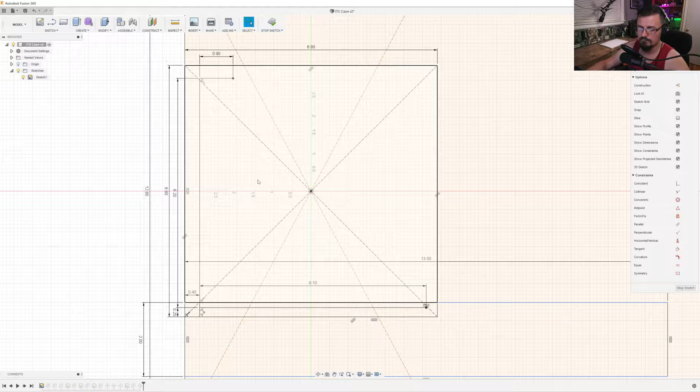Alright, this has got to go 6.20. And then 0.90. This is going to be 620. Okay, and then point. Alright.

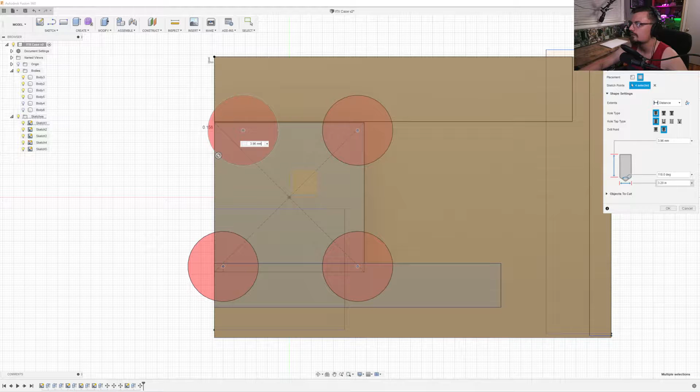Now I'm going to create some holes here, here, here, and here. 3.16 - that's not right. 3.96 millimeters, what? Oh, that's the height, I don't want the height, I want the width. So 0.16, boom. Distance. Let's see. Huh, let's see.

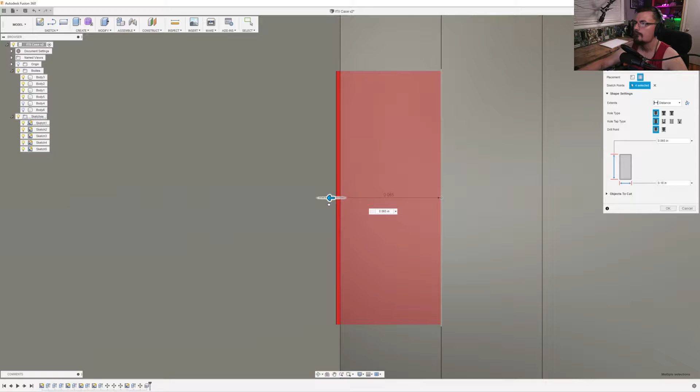Flip it. Whatever, that'll work. Cool.

So now we got our motherboard holes kind of drilled out in our plate here. So now we can start looking at our mounting tabs.

Actually, I need to go back to this set of holes because we are actually going to tap these. So now we have them tapped to what a standoff would be, so that'll just thread straight into there.

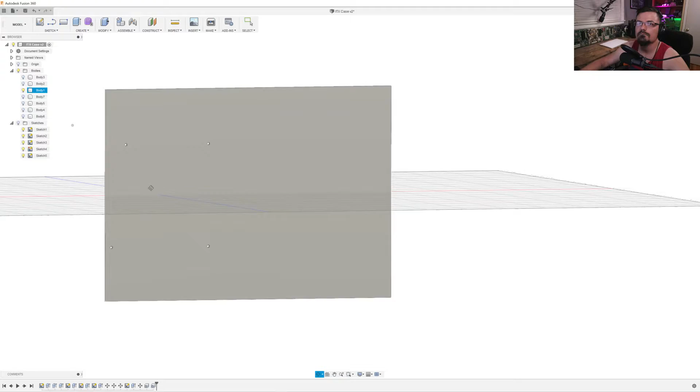Alright. Let me go. Don't know what holes I should put through next.

So what I'm thinking is I probably need to go ahead and put like the SSD mount in the side of it, but again, I'm not really sure. I mean, 2 could easily mount over here. I'm thinking long ways. But I'm not really sure. That's a good thing about design.

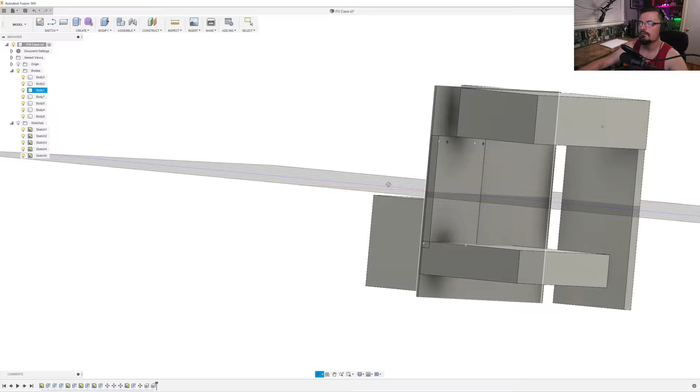Like, you get to kind of weigh things out and place things and just see where the best fit would be. So I should probably make...

I mean, nothing's really bolting other than the motherboard. Nothing's really bolting to the tray. And I want to be able to leave it so if someone wants to put a bulkhead fitting or something like that, I really want to be able to just leave that up to the design of whoever purchases the case. Because each thing is going to be so different. I mean, video cards may be shorter, fittings may not line up in the same spots. I mean, it really is just kind of up in the air.

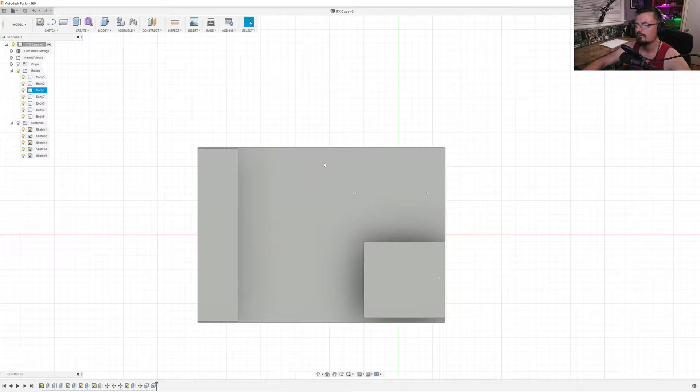Let's see. Yeah, I think I'm gonna go ahead and put like 2 SSD mounts right here. I mean, you could even go ham and probably put in 3 1/2 inch like holes on the bottom.

Well, no, you don't really want to. Well, I guess you could. You could just have standoffs that thread into the bottom holes of like a mechanical hard drive and stand it off from the tray. And yeah, just hand tighten them in there, and then you would be able to hold it up to the actual motherboard tray and screw it in from the other side. And that would probably hold it in pretty well.

Same thing with SSDs. And the good thing about that is you wouldn't have a tray kind of extruding out from the motherboard tray here, kind of like this radiator fan combo. You wouldn't have a cage for hard drives to go in, but you would have the mounting points there, and a screw is going to sit really flat on the other side here. So I think that may be the best bet.

Just screw standoffs into the actual hard drives and mount it up there and screw it from the other side. That may work really well.